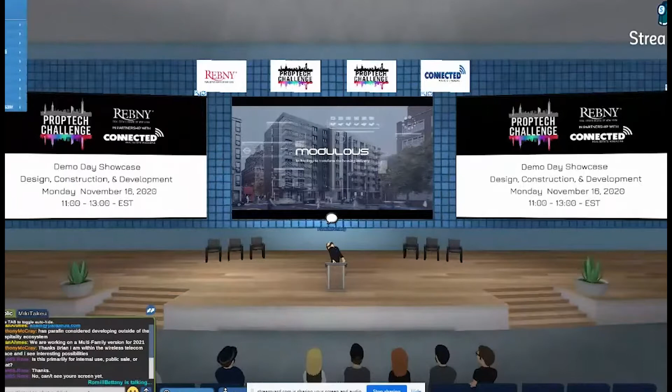My name is Romill Bettany, co-founder of Modulous, and we are a London-based construction technology business with the sole aim of transforming the housing industry.

After many years of frustration in the construction industry, our team decided it was time for change, and we set out to revolutionize the way homes are delivered.

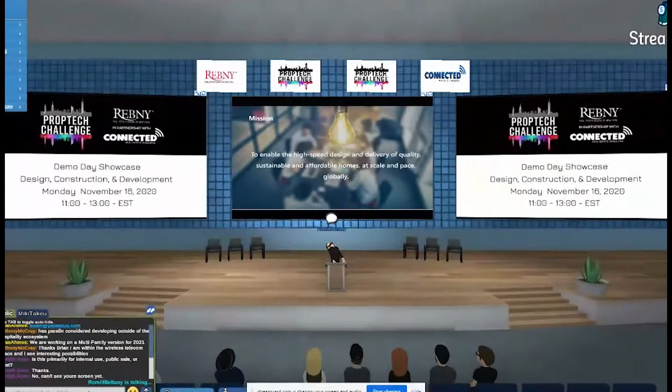Our mission, quite simply, is to enable the high-speed design and delivery of quality, sustainable, and affordable homes at scale and pace globally. There is a chronic housing shortage, which if some of you joined in the roundtable we discussed briefly - population has doubled in my lifetime alone.

We need to build over 500 million new homes at a cost of approximately $16 trillion just to keep pace. And the industry just doesn't have the ability to deliver that many homes.

In addition, we're faced with an aging population. Households are reducing in size. There is a construction skills shortage and a material shortage, and construction costs are constantly escalating.

One of the biggest problems is a very protracted and inefficient design and planning process. There's a 4 million home backlog in the UK alone, and a growing deficit of about 140,000 homes a year.

So the problem and the scale of the problem is enormous, and it was clear to us that a complete change was needed.

The construction industry has been identified as the second least digitized industry on the planet, with only hunting and fishing lower. This problem has been picked up by the World Economic Forum and various other publications by McKinsey and KPMG.

Our team came together in 2017 and has a very rich heritage in design, construction, and also finance, and experience in designing and delivering major projects, including some well-known projects like Emirates Stadium and the Google headquarters in California, which some of you might be familiar with.

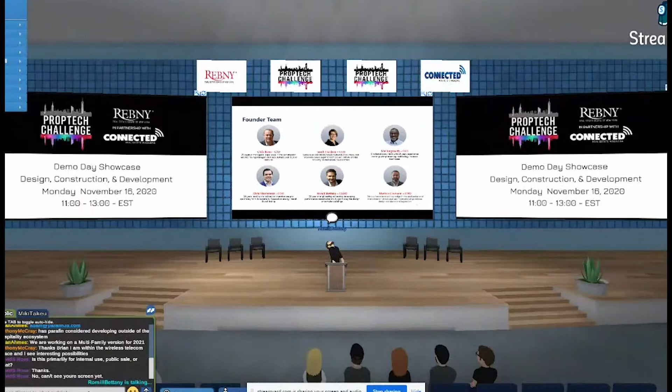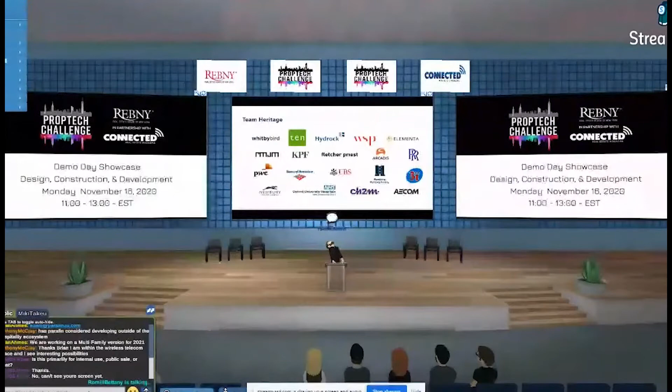The team heritage provides us with a unique depth of experience, from consulting engineering to architecture to tech innovation to finance, from a wide range of global companies and organizations.

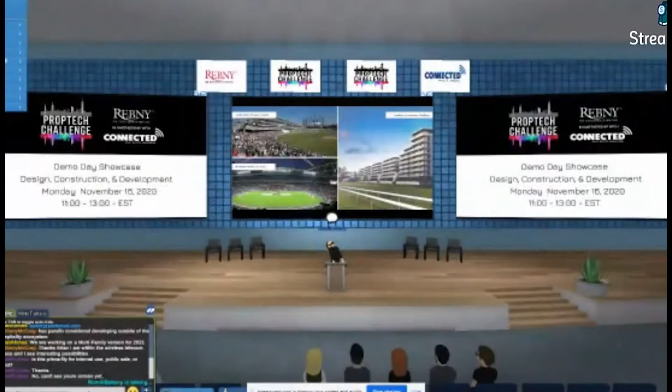Some of the projects that the team have delivered include some well-known stadia here in London, Newbury Racecourse, airports, BBC Broadcasting House, the Google headquarters in California that I've mentioned, and a lot of residential projects as well.

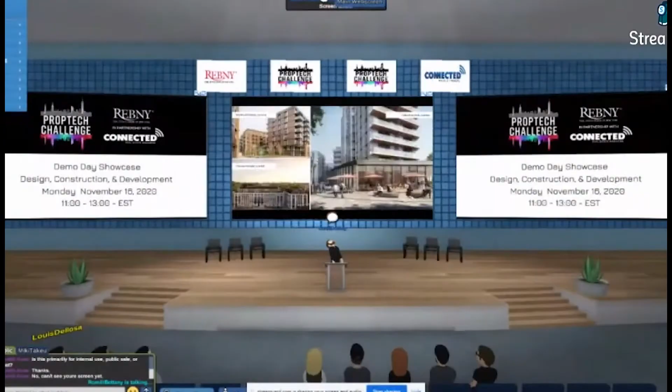So our understanding of the problem in delivering homes at scale and pace is very well understood by the team.

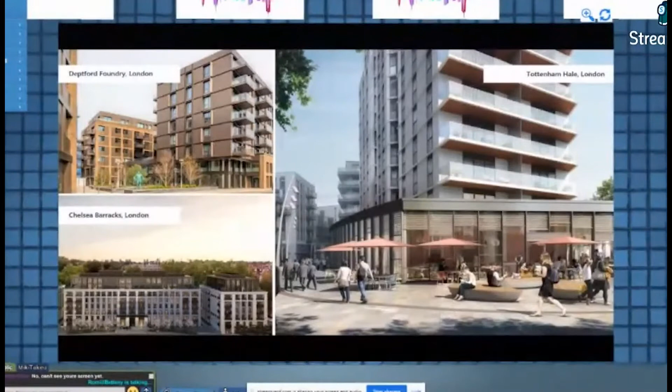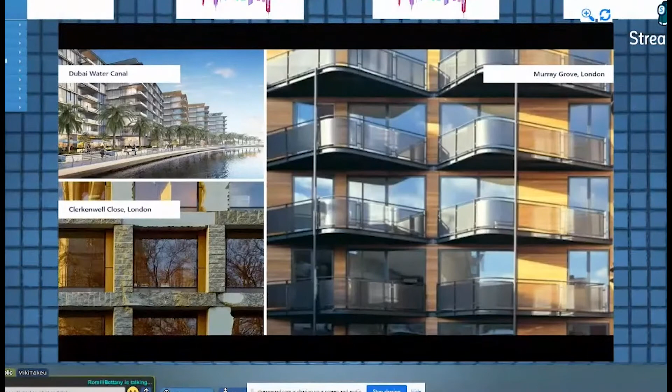So based on our heritage and experience at Murray Grove and Google headquarters, amongst others, the very core of our DNA embodies our strive for zero carbon and zero waste design.

This mirrors the Sustainable Development Goals, which are a collection of 17 interlinked goals, designed to be a blueprint to achieve a better and more sustainable future for all. These SDGs were set in 2015 by the United Nations General Assembly and are intended to be achieved by the year 2030. That's quite a steep target.

Our modular solution has 11 specific touch points within the SDGs. Health and well-being, one of the key ones, which ensures that there are no materials of concern and that the homes meet the WELL standards.

Others including affordable and clean energy, decent work and economic growth, sustainable cities and communities, responsible consumption and production, climate action, partnership for the goals.

Primary focus for us being to ensure that our build solution increases energy efficiency, reduces energy use, reduces building waste, and minimizes vehicle movements from suppliers and to sites and around sites.

The only solution for us was to develop a fast-track platform to accelerate the design process, digitize the construction process, and enable a network of third-party assemblers to deliver homes locally to the project.

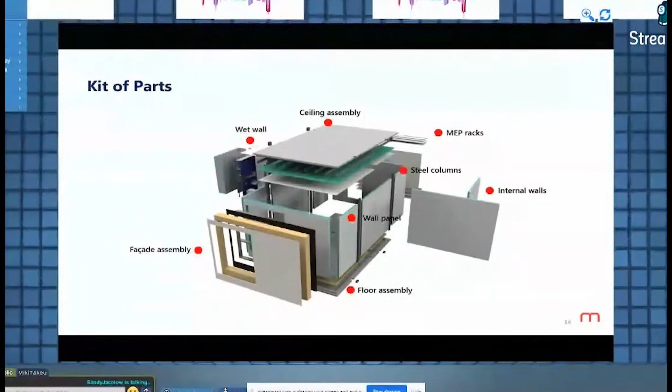I'm not sure where Ramel disappeared to.